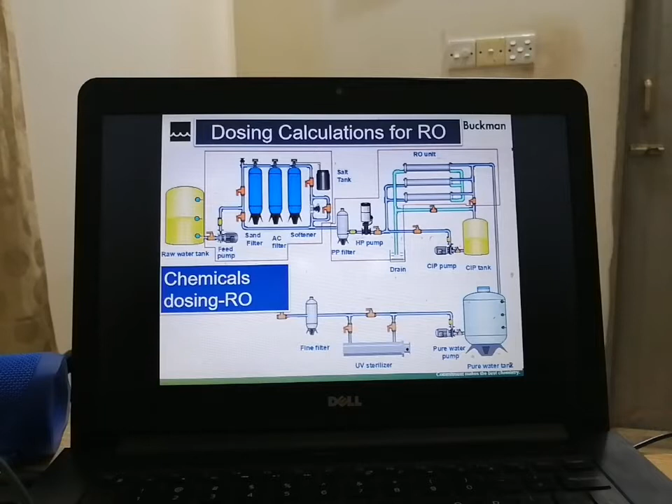But still, for many people, I'd like to give a small video of what RO actually looks like. Please enjoy the video and watch it. This is available on the internet. If you watch it, it is self-explanatory what RO is and how it is structured. It's a 4-minute video. After watching the video, I will come back for the dosing calculation. So now I will stop talking. Please watch the video. Thank you.

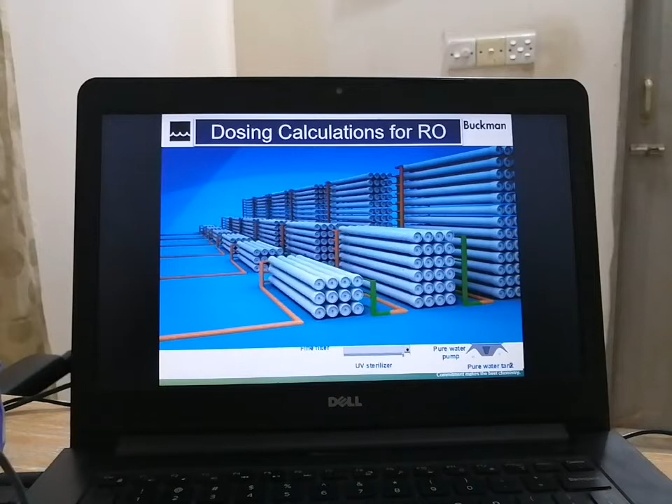The St. Mary's Water Recycling Plant uses reverse osmosis to further treat wastewater after the ultrafiltration process. Reverse osmosis membranes are constructed from a membrane flat sheet. It is comprised of 3 layers: a polyester fabric support base, a microporous polysulfone layer, and a 0.2 micron thick polyamide barrier layer. The polysulfone layer strengthens the very thin barrier layer. It is the barrier layer that removes nutrients, chemicals, bacteria, and viruses from the water.

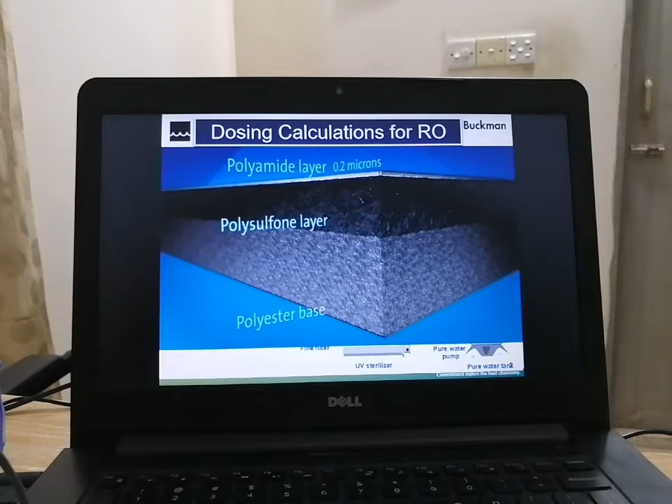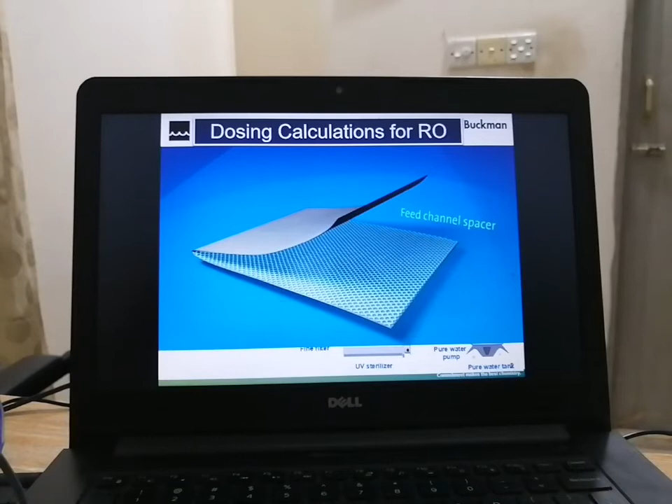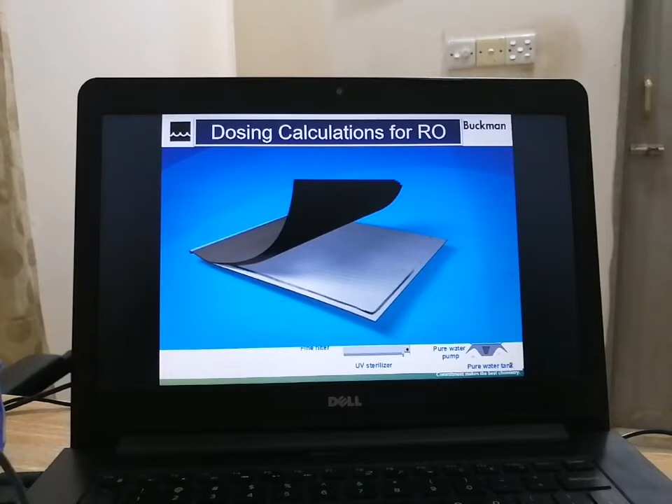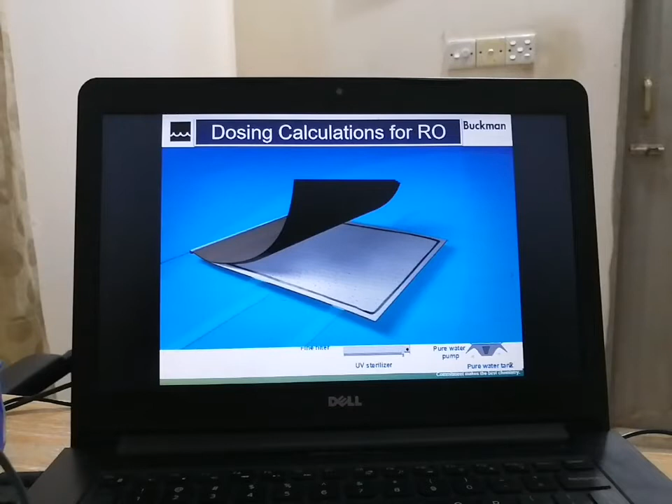Membrane flat sheet is combined with a sheet of feed channel spacer. This provides turbulence and creates space between the membrane sheets for the feed water. A sheet of permeate spacer is added to the membrane sheets and feed channel spacer. This enables the final recycled water product, or permeate, to flow evenly across the entire membrane surface, even under high pressure. The back of the membrane is completely sealed to the edges of the permeate spacer. The membrane sheets are glued along each of the 3 exposed sides and rolled around the core tube.

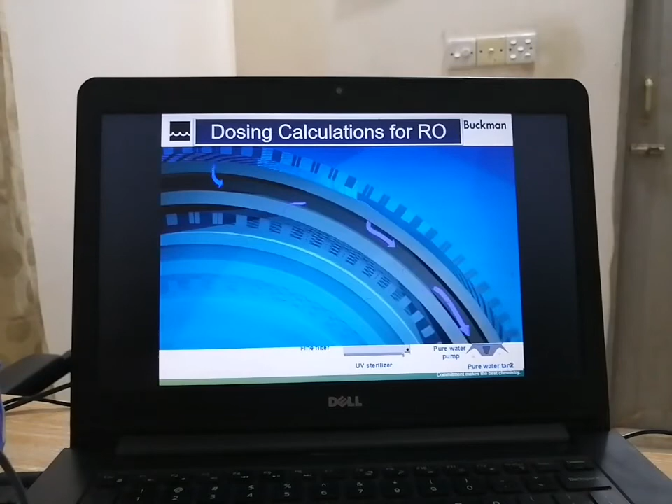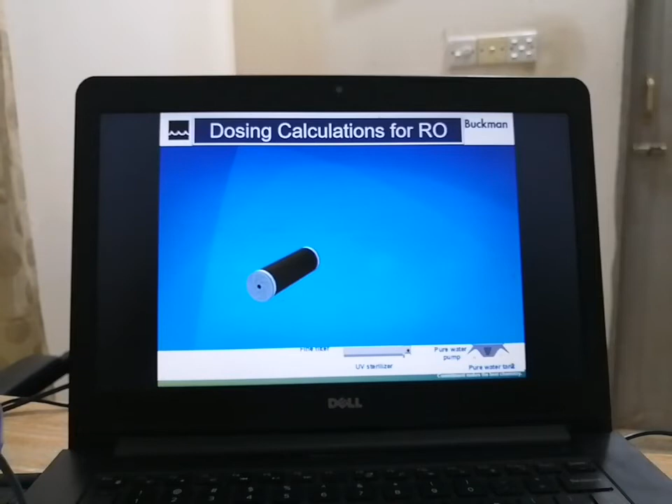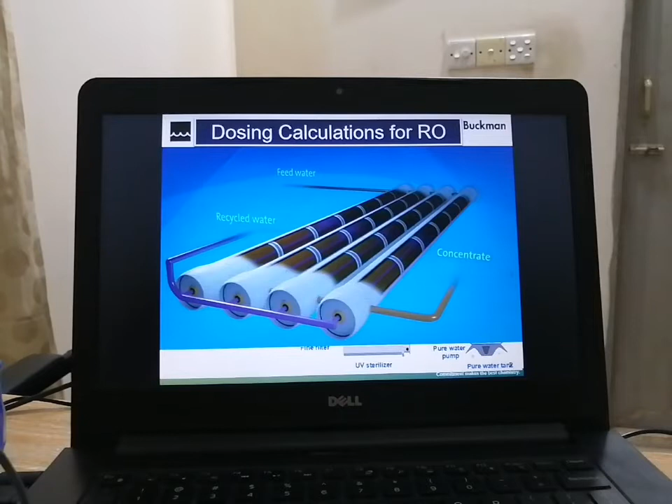Feed water is forced through the feed channel spacer and into the barrier layer of the membrane. Water passes through the membrane surface into the permeate channel. It flows in a spiral direction and collects in the core tube. This water is the final recycled water product, or permeate. There are 7 spiral wound elements loaded in one pressure vessel. Once the end adapter is connected to the last element and the pressure vessel is sealed, feed water can be introduced. Feed water is pumped at high pressure into the vessel. As it travels, small molecules like water pass through the membrane, while larger particles such as salt, bacteria, and viruses do not. The final recycled water product is collected from the end of the elements. The concentrate or reject from that vessel flows to another stage, producing more recycled water.

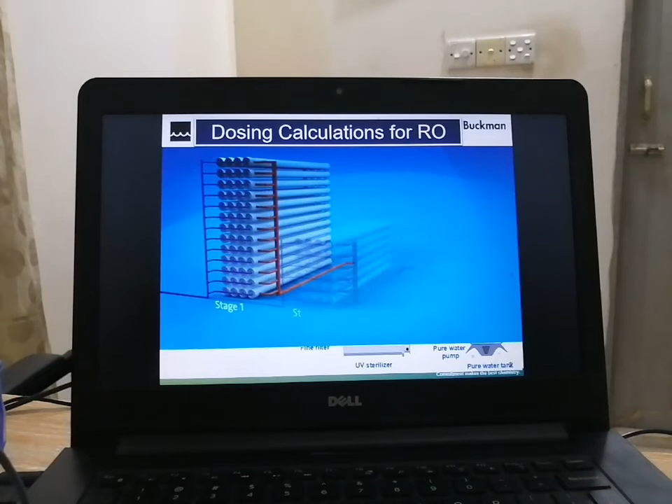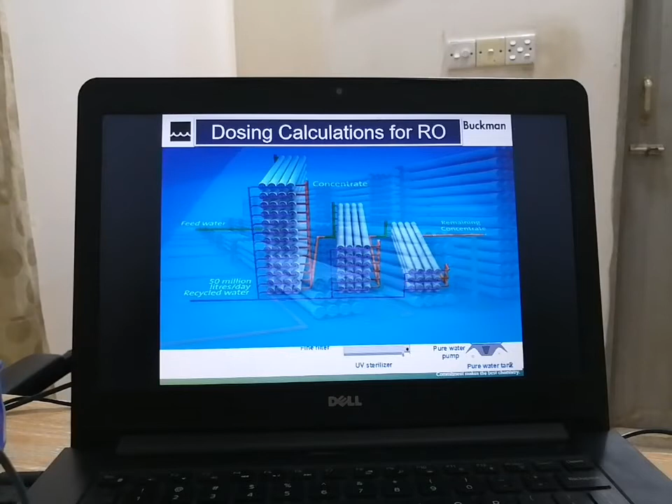At St. Mary's, there are 6 reverse osmosis treatment trains, each with 3 stages. This design produces the highest amount of recycled water with reduced concentrate waste. Stage 1 has 52 pressure vessels, Stage 2 has 24 pressure vessels, and Stage 3 has 12 pressure vessels. 58 million litres of feed water enters the reverse osmosis system on a daily basis. As the feed water passes through each stage, more recycled water is extracted. 65% of recycled water is extracted at Stage 1. The remaining 35% is passed through Stage 2, where a further 10% is extracted. The final 25% is passed through Stage 3, where the last 5% of recycled water is extracted. 80% of all feed water is recovered as recycled water. An average of 50 million litres of recycled water is produced every day at St. Mary's. The remaining concentrate contains so much salt and impurities that to recycle it would not make economic sense. This concentrate stream of 8 million litres a day is sent to North Head Wastewater Treatment Plant, where it is treated and released into the ocean.

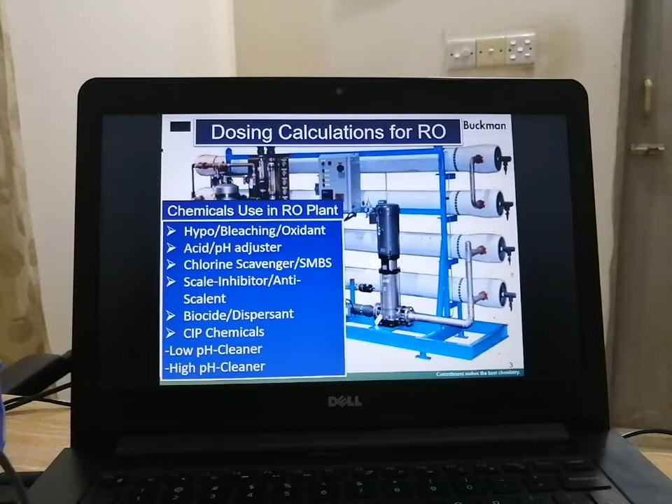We have to use a chlorine scavenger, which can be SMBS, sodium metabisulfite. Then we have to use a scale inhibitor or anti-scalant chemical. We sometimes have to use biocide, biodispersant, and we have to use CIP chemicals, the low pH cleaner and high pH cleaner. So these are the chemistry that we have to use for an RO system. So if we want to understand the dosing of each of the chemicals, I like to give you all a brief, at a glance, in a short time.

But please, this is a process, this is a way out I like to share with you. The number, the percentage, the unit I use is not identical, is not applicable for everywhere, is not applicable for all plants, depending on the design, depending on the feed water, depending on the chemical available, depending on the environment. All should use independent design and calculation.

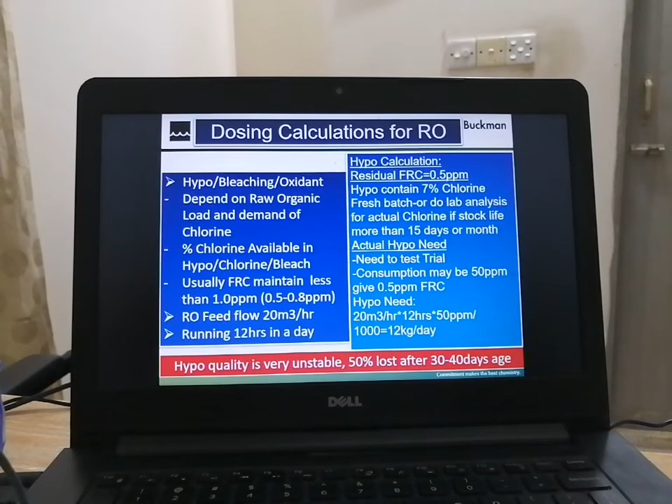So the second product, immediately after hypo, we have to use for RO: as the RO membrane is susceptible to chlorine, we have to remove all chlorine from the feed water of RO. So we have to use a chemistry that scavenges any free chlorine remaining in the system, and that scavenger we popularly use is sodium metabisulfite. Many other chemistries are also available, but here for calculation we consider SMBS.

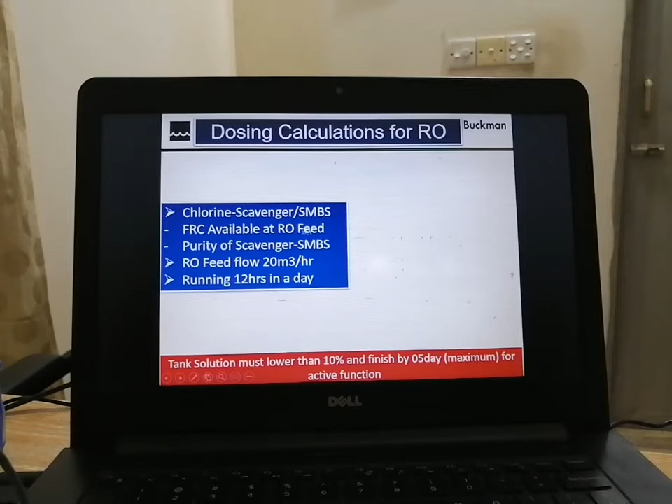So if we want to calculate the amount of SMBS, we need to know very clearly how much free residual chlorine is available in the RO feed, the purity of the scavenger, the SMBS purity, and the RO inlet parameters and running hours. So if we have all this information, we can make the calculation.

Consider residual free chlorine of 0.5 ppm maintained in feed, and SMBS purity is 90%, active purity meaning active ingredient is 90%. For easy calculation and as a thumb rule, we consider 1 ppm SMBS neutralizes 1 ppm free residual chlorine. So practically 0.5 ppm free residual chlorine needs 0.5 ppm SMBS; to keep some surplus so that free residual chlorine will not be available, we consider the dose as 1 ppm for SMBS.

So for 20 meter cube and 12 hours, it becomes 20 into 12 into 1 divided by 1000, 0.240 kg per day, means 240 gram per day. The important thing is the tank solution we must make below 10%, and if we make the solution we must finish it within 5 days. After 5 days the solution expires, and its effectiveness is reduced.

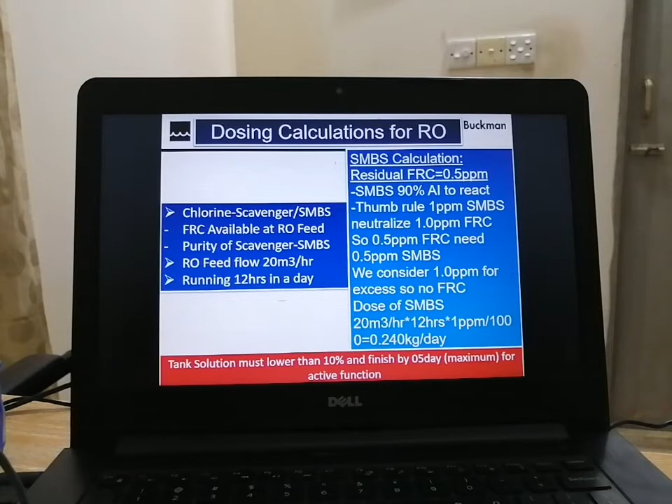So I'm coming to the point. So first, for RO dosing calculation, we have to calculate the hypo. Second, we have to calculate the SMBS. Third, the thing that we usually use in RO, that is anti-scalant.

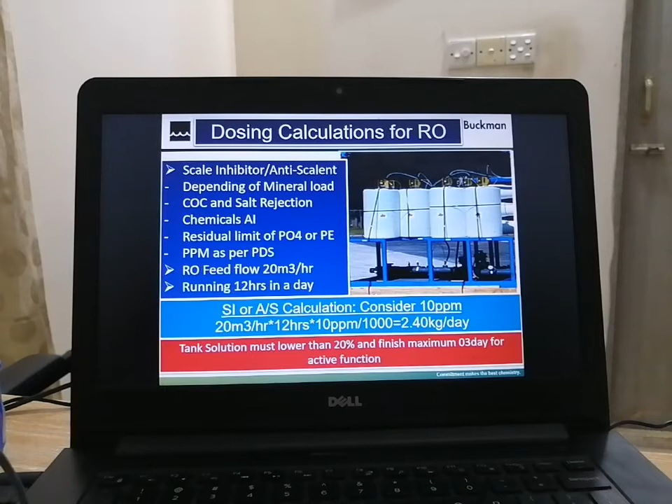Next, the product that we usually use for RO plant is biocide or biodispersant, depending on my RO organic load, RO fouling tendency, my hypo activity, and my pre-treatment. For biocide, we have to consider the organic load and RO on-off trend. Sometimes we keep our RO off and on, and sometimes off for 1-2 days or more. The RO plant under off condition, the more frequently it's off, the higher the chance of organic fouling. So for that case, we have to use biocide and biodispersant.

If you have the RO feed flow and running hour, we can easily calculate the RO requirement of biocide and biodispersant. Thank you Humayun Kobi for connecting.

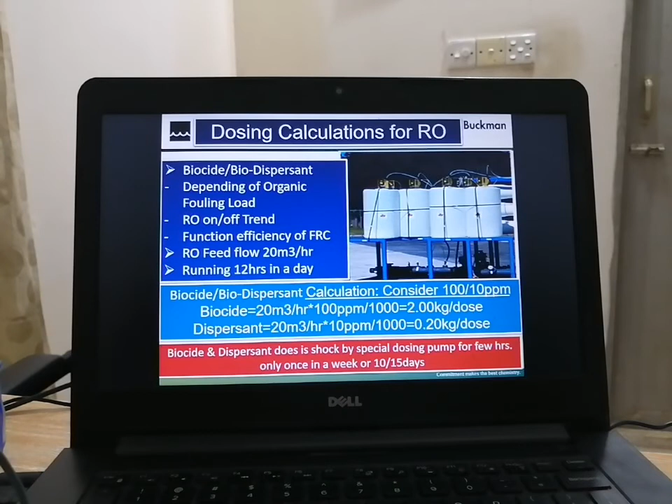You can dose this as a shock dose, and we prepare the solution, which should not be above 20%. We can dose once in a week, once in 10 days, or once in 15 days for a certain hour, depending on available facilities. So this is how we calculate the biocide or biodispersant.

The rest of the product we have to use is pH adjuster - either acid or alkali, depending on the pH before RO or after RO, we might have to adjust the pH.

Considering the after RO water, the pH might be low, or before RO water pH might be high. If our pH is high, we have to use acid to reduce the pH, to control the RSI or control the LSI. Lower pH means less chance of scaling, we know that. So we have to dose the acid to reduce the pH.

Sometimes after RO, pH gets reduced, so depending on the purpose where the water is used, we have to use alkali to increase the pH of treated water. So in both cases, we have to use either pH adjuster - either acid or alkali - if we want to increase or decrease the pH.

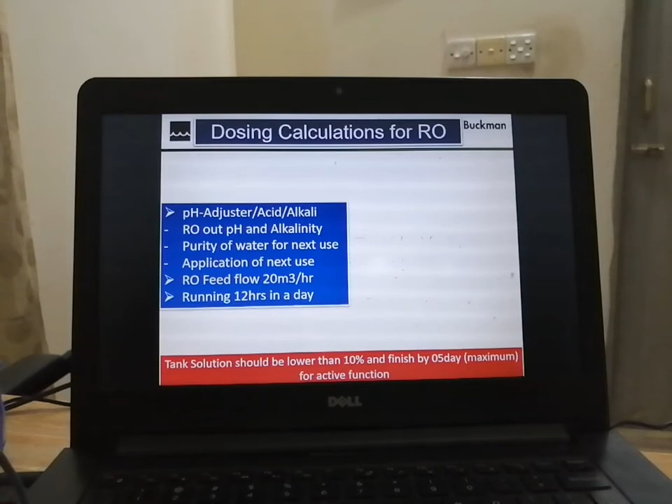So how do we calculate for acid or alkali, here at a glance you can see. For acid calculation, we have to check the alkalinity, and we have to check the pH-alkalinity table, how much pH I like to maintain and how much alkalinity should be there, and what is the current alkalinity.

So I consider here I have to reduce alkalinity by 20 ppm, and the acid available to me is hydrochloric acid at 30%. If it is 20 ppm alkalinity I have to reduce, I consider 1 ppm acid per ppm of alkalinity. So if I want to reduce 20 ppm alkalinity, I use 20 ppm hydrochloric acid.

Thank you Tuhin Borua Vaya, you're asking me a question about keeping RO running for a long time. It's really a good, tough, and professional job to keep RO perfectly all right for a long time. I'll come back to you later on your comment. Today I'm just sharing the dosing calculation - I will come back to you, Tuhin Borua Vaya.

So here, if I want to reduce 20 ppm alkalinity, I have to dose 20 ppm of hydrochloric acid. If it is 20 meter cube per hour for 12 hours at 20 ppm, this becomes the calculation. And if it is 30% purity, the formula is you have to divide it by the purity percentage, so it becomes 16 kg in a day.

So for this process we have to use 16 kg per day. If the density is 1.1, it becomes 14.55 liter for this. The tank solution should be lower than 10%, and if we make a solution, it must be finished within a maximum of 5 days.

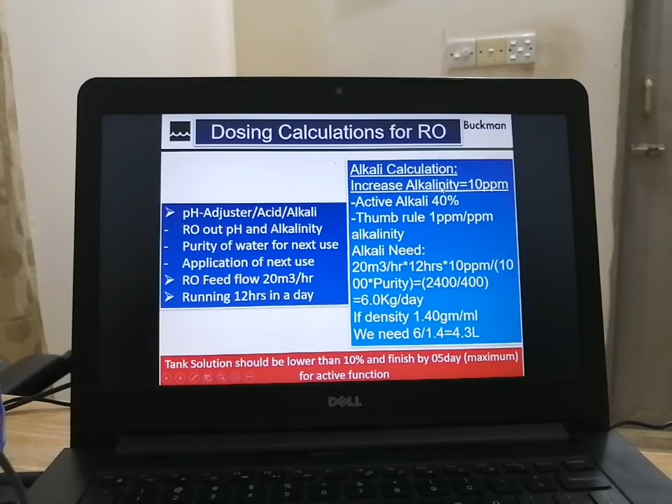Similarly, if we want to calculate the alkalinity, means increase the pH after RO, sometimes we might require to increase the pH. Consider I have to increase the alkalinity 10 ppm. The alkalinity solution I have is 40% active, and thumb rule is similar, 1 ppm per ppm alkalinity. So if I want to increase 10 ppm alkalinity, I have to dose with the 40% active ingredient. I have to dose 20 into 12 into 10 divided by 1000 into purity, so it becomes 6 kg per day. If it is a caustic kind of solution and the density is 1.4, it becomes 4.3 liter per day we have to use to increase 10 ppm of alkalinity.

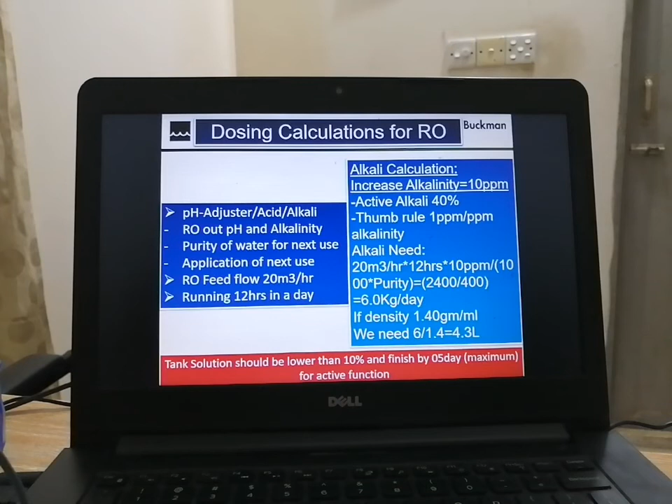So this is the way how to calculate. Please do not consider my calculation as identical, can be used for any plant. It is not at all - you can't use this for any plant. This is a thumb rule. This is the way you have to calculate according to your availability, your plant, and your alkalinity reduction or increase requirement. Please take it just as a guideline.

So finally, after running RO for certain time, we have to go for RO CIP. There we have to do some cleaning, online cleaning and cleaning process for the RO membrane. During the cleaning process, we use two kinds of chemicals that we call low pH cleaner and high pH cleaner. For the high pH and low pH cleaner, we have to select the dose, and depending on the fouling, we need to select the chemistry and the chemical, depending on the RO manufacturer guideline - there are a lot of different companies and different chemicals we can use.

So we have to understand what fouling has happened - is it inorganic, organic, or what type of fouling. Depending on that, we have to select the product. We have to know the active ingredient of the chemical, or the dosing amount from the supplier. We have to understand the OEM advice, and also understand from the product data sheet how much percentage they prefer to use.

So if we have all the data, we have to understand the CIP tank capacity - here consider 1000 liter - and CIP flow, here consider 20 meter cube per hour. With all the data, we can calculate the CIP dosing amount. Very simple - usually we dose at the CIP tank, so we consider CIP tank capacity. If I consider 2% chemical dose, then 1000 liter at 2% gives 20 kg per circulation.

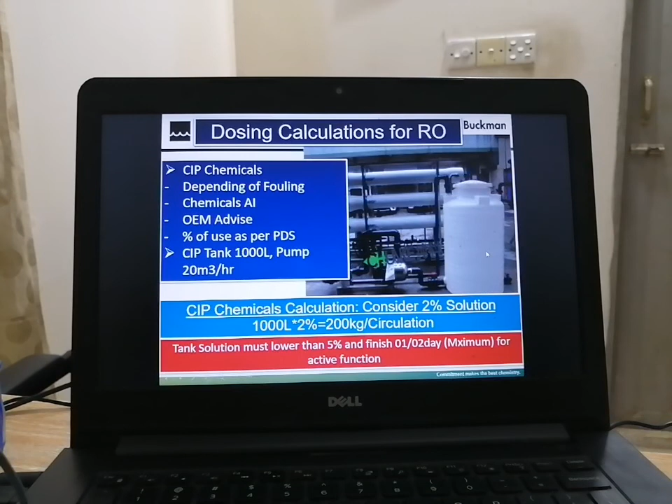So I have to use 200 kg chemical and make solution for 1000 liter, and recirculate this solution. Usually first we recirculate high pH cleaner, then circulate low pH cleaner. As a safety measure, tank solution should not go above 5%, and if we make the solution, we should do the work in one day, or we can keep the solution maximum 2 days for its efficiency. After 2 days the solution efficiency gets reduced, so we can't use it.

So this is the RO calculation, RO dosing calculation. If you have any question on this, please pass on comments.

This is our 9th class on water chemistry, and I will keep it continuing. Tomorrow I will come with more dosing calculation regarding especially cooling water treatments, and after that we will go for boiler water treatment.

So today I finished the RO dosing calculation formulas, some tips and tricks. If you have any question, please put it in comments.